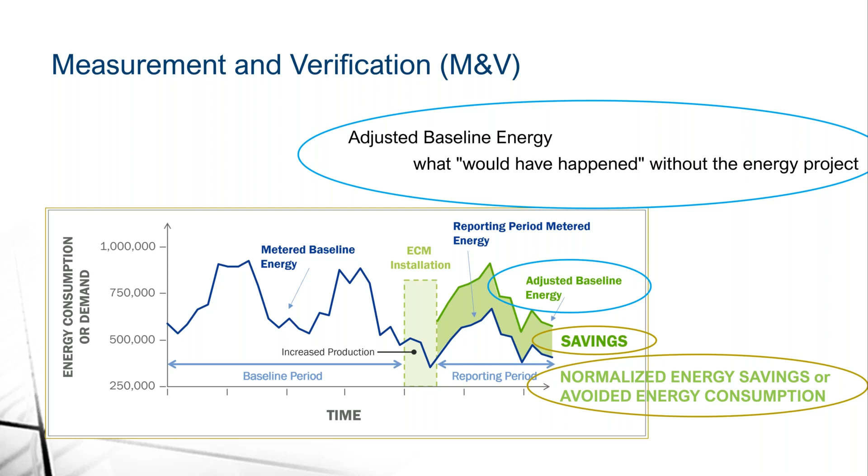And that would be normalized energy savings. What we call that is routine adjustments. These routine adjustments account for expected changes in energy consumption based on the independent variables. So independent variables that are included in the mathematical model, such as weather and occupancy, are used to adjust the baseline energy so that it can be directly compared to the reporting period energy or to a normalized reporting period energy. And so this gives us what we like to call an apples to apples comparison.

So what happens when things don't stay the same over time as expected? You can have a long baseline period that establishes very solid and continuous usage patterns, and then an event that causes unexpected changes in the energy use comes along, such as this shelter in place and COVID-19 situation that we are all dealing with. So if your energy usage changes within your measurement boundary, and your measurement boundary is either the whole facility for option C, the meter, or it could be for retrofit isolation, and these are due to changes unrelated to the energy project and unrelated to the independent variables, we call these static factors.

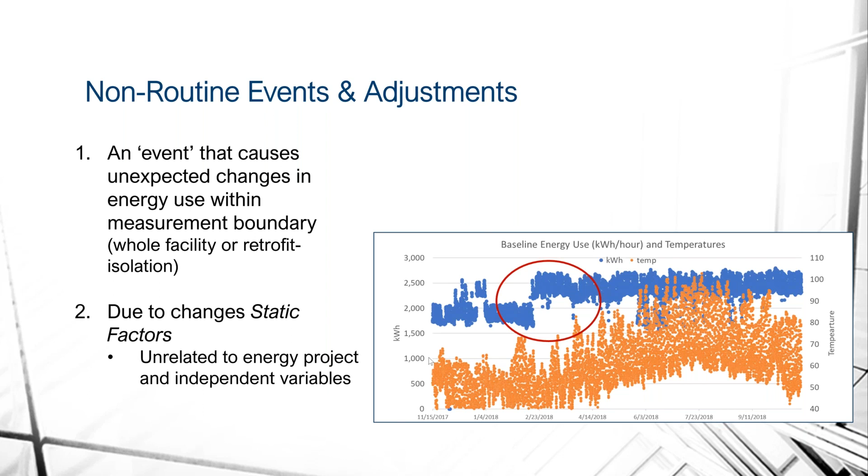Sorry, I'm having trouble changing my slide. There we go.

So when an event like this takes place, we may have to make a non-routine adjustment in addition to the regular adjustments, the routine adjustments, to account for these changes and how they have impacted our energy savings. So a non-routine adjustment is an individually engineered calculation that is determined for a specific project in a specific situation to account for the effects to your energy savings from these externalities that have changed.

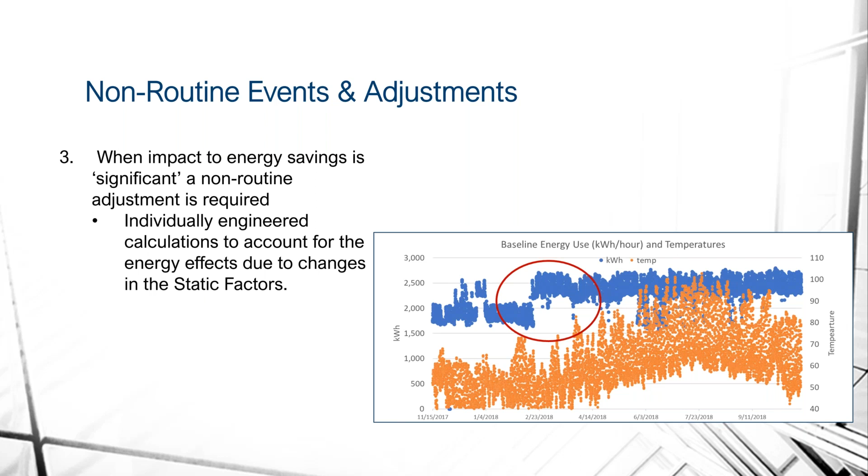I have the static factors, and there was a download available regarding static factors, and it is not a comprehensive list, but it's certainly a large list of static factors, which is a bit of a misnomer. We call them static factors rather than variables because they are not included in the energy model, but they are key characteristics of a facility which affect the energy consumption. So these are characteristics that are not expected to change. They're not included in the mathematical model, and typically we want to have those fully documented during the baseline period. So if you've done a comprehensive energy audit according to ASHRAE or others, you will typically have documented the vast majority of these key elements around your facility.

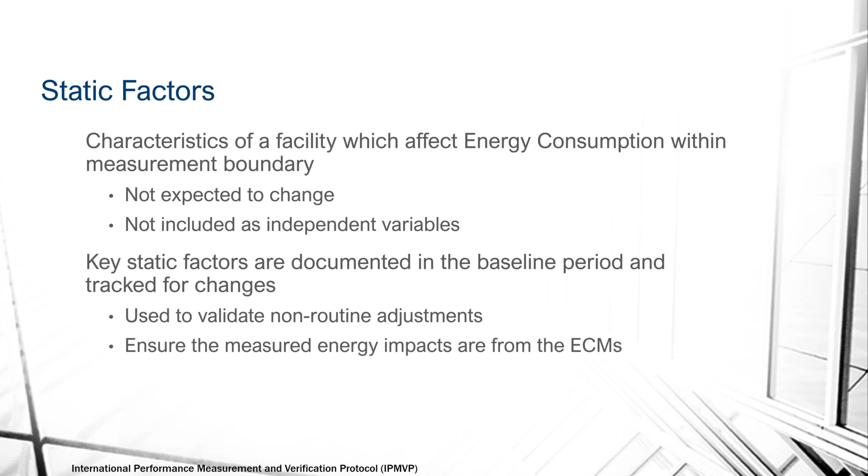It's important that they're documented in the baseline and tracked for changes for the duration of the project, because these static factors are used to validate any non-routine adjustments that are needed. And if you do not have that data, it is very difficult to have something to compare it to. Having these static factors documented also ensures that the impacts that we are measuring in the energy use are from the energy conservation measures and not from other changes at the facility.

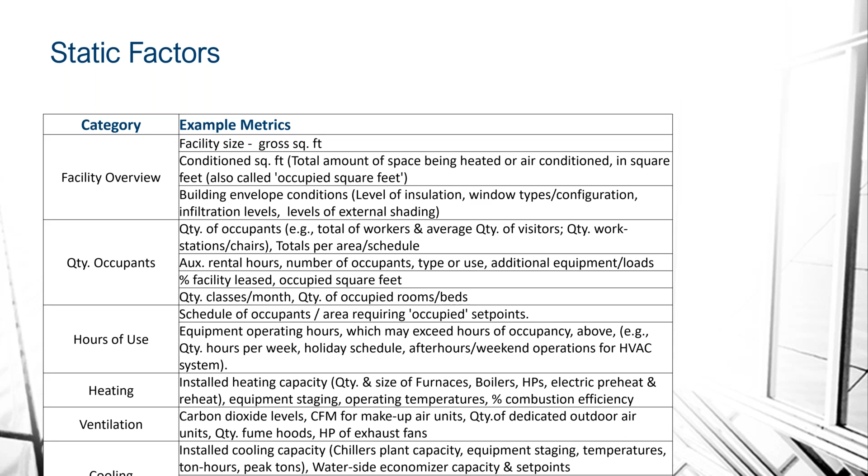So here is that document, or a piece of that document that lists several metrics. They're categorized by facility overview, hours of use, heating, ventilation, cooling, industrial loads, kitchen, cooking, hotels. It depends on what your drivers are, what will be the most important static factors for your facility. So that will vary. And this document is a part of the new non-routine events and non-routine adjustments application guide that IPMVP is working on with my team and Lawrence Berkeley National Lab. So that's a little bit of a sneak peek on what we're going to have included in that document.

So one of the things about non-routine events is that it can have a different impact depending on when it occurs during your project. So if you're in your baseline period and you encounter a non-routine event, you will have increased uncertainty in your energy model. The unexpected variation, if included in your baseline model, will create less certainty in the predictions.

It can also invalidate your baseline model if there is data that is included that does not represent what is going to be in the future. So you have to be careful about those non-routine events in the baseline period skewing your energy model.

Now, if you're in your reporting period and you encounter a non-routine event, it can either obscure or inflate the savings from your energy conservation measures. And that's actually one of your worst case scenarios, if you're in the reporting period. More difficult to address.

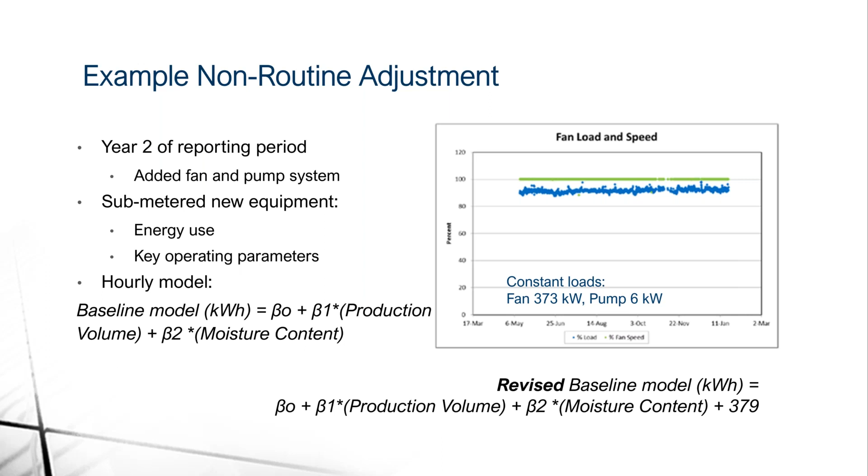So as I mentioned before, we are about to publish a non-routine event and non-routine adjustment application guide for the IPMVP. We're very excited about that. We also have in the works an advanced meter-based measurement and verification application guide to bring forward our option C, advanced modeling strategies. So that should be available soon.

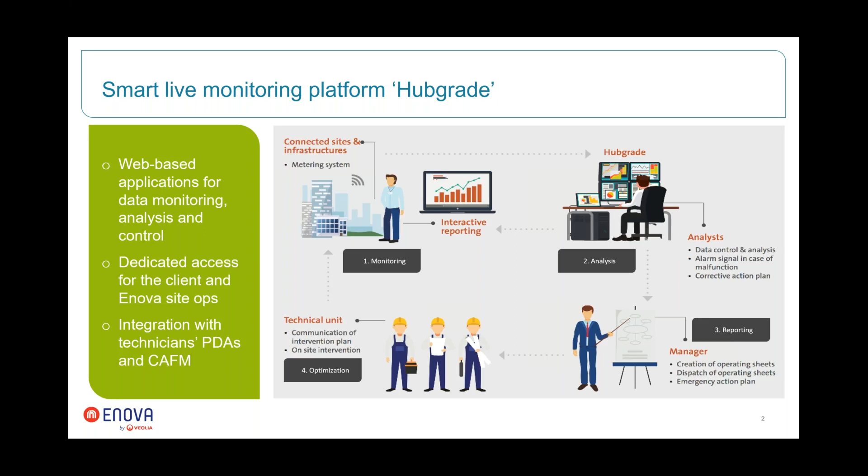So it's a closed cycle, since all the work orders that have to be issued for energy management come on the PDAs of the technicians, that they go and they deliver and they close directly on the PDA. The engineers can see it and see the effect as it goes. So it's a live system in order to reduce any loss as much as possible. This Hubgrade, we have more than 23,000 points that we are monitoring.

Enova now has bank guaranteed 68 million AED in savings. We issued in 2019 3,100 work orders regarding energy, and we are now introducing some new proof of concept works regarding machine learning regarding energy as well. And this will help us as well in the condition-based maintenance.

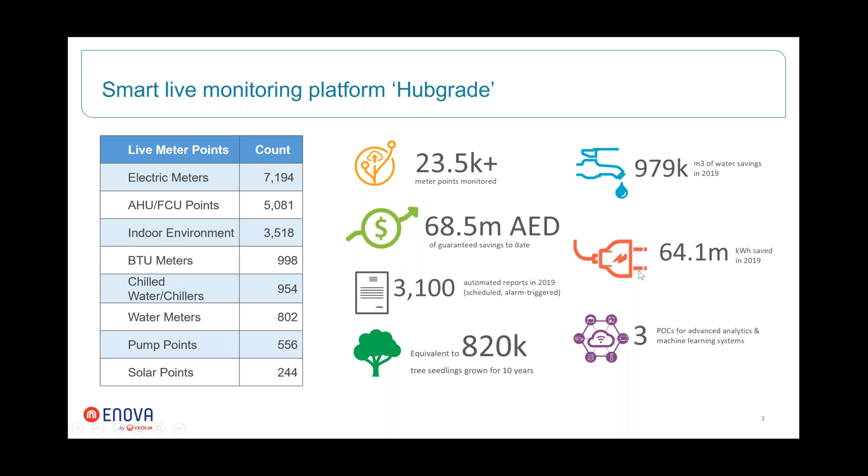So the regular journey of the M&V, as we saw with Leah, is we check the history. Most of the times, we install loggers. We perform the ASHRAE level 2 audit. We create the regressions, and we set the baseline. We identify the correlation, so what's affecting the energy saving.

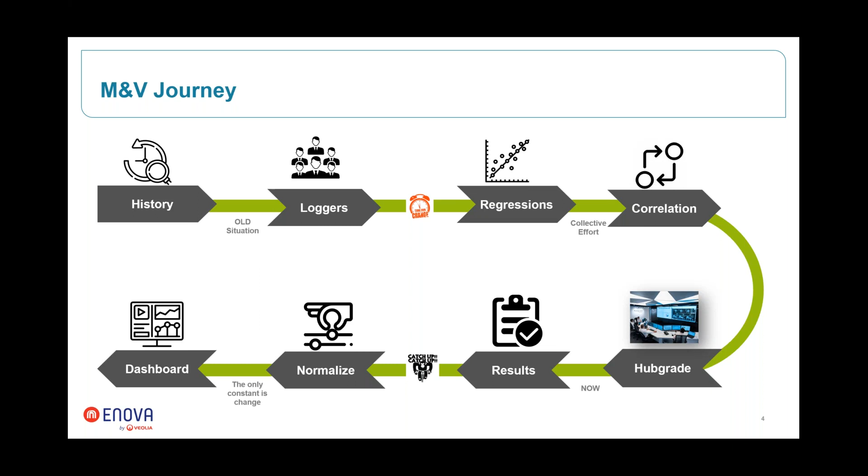We connect to Hubgrade. We monitor the results, then we normalize based on these correlations, and then we submit to the client based on a live dashboard. And this is usually a straightforward process, and it gives you a very clear picture of the baseline and the adjusted baseline.

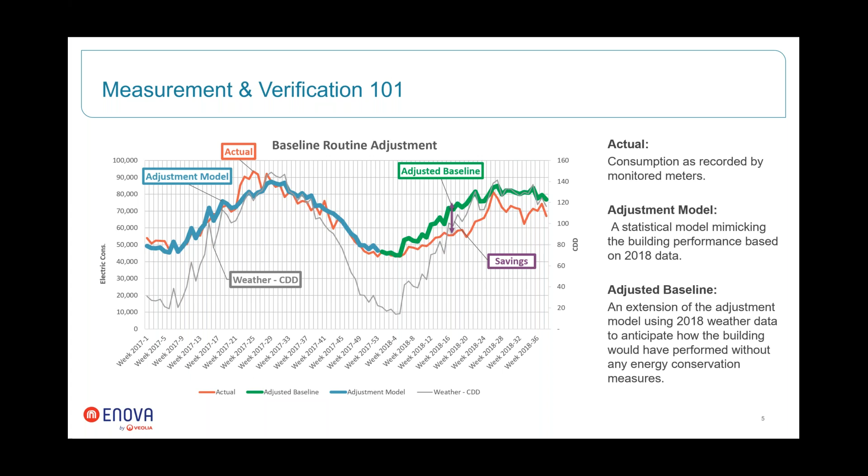So everything was clear until suddenly change happened, and it happened in an abnormal way. And this is when COVID hit, and we were asked to shut down the malls almost entirely. So before the shutdown, the main impactful factors on the adjustment were humidity and temperature. Footfall, or the number of people visiting, was part of the equation, but since it was stable, it did not affect the normalization drastically.

And just for information, Mall of the Emirates has more than 44 million visitors a year. The average daily visitors for Mall of the Emirates is around 120 to 150,000 visitors per day, which is a huge complex we're talking about. So after the shutdown, the humidity and temperature kept the effect, and then suddenly we had a huge disruption in footfall and on-off, which is shutting down the equipment in certain locations.

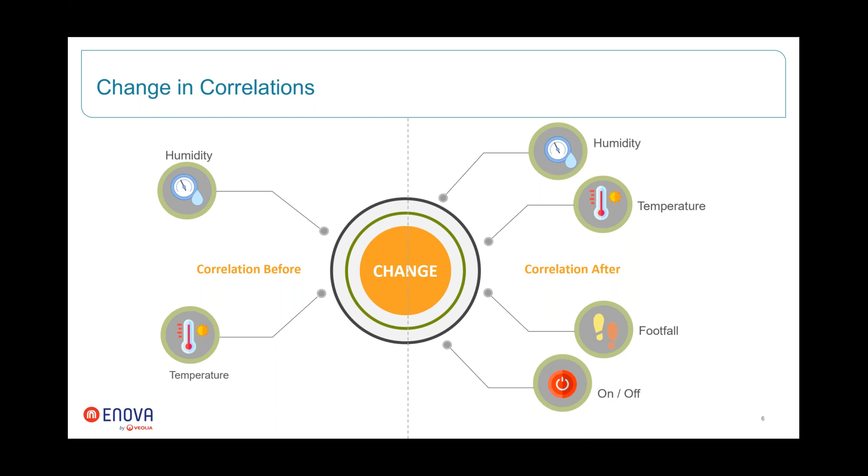So how did Enova approach this event? We used the change management process that is usually advised by McKinsey. So it's aspire, assess, architect, then we action, we advance, monitor, learn, and adjust. So I'm going to take you through these steps for Mall of the Emirates.

Again, some information about Mall of the Emirates. It's one of the biggest shopping malls in the world. It includes Ski Dubai, which is an indoor ski slope in the middle of the desert. We have around 630 plus brands, and as I said, it has 44 million visitors per year.

So Aspire: the minute this happened, we sat with the client and we set a high-level target of 65% cost reduction, since the mall is almost in shutdown except for a certain area. So we agreed this should be around 65% cost reduction in utilities. And then we assess the situation. You can see this

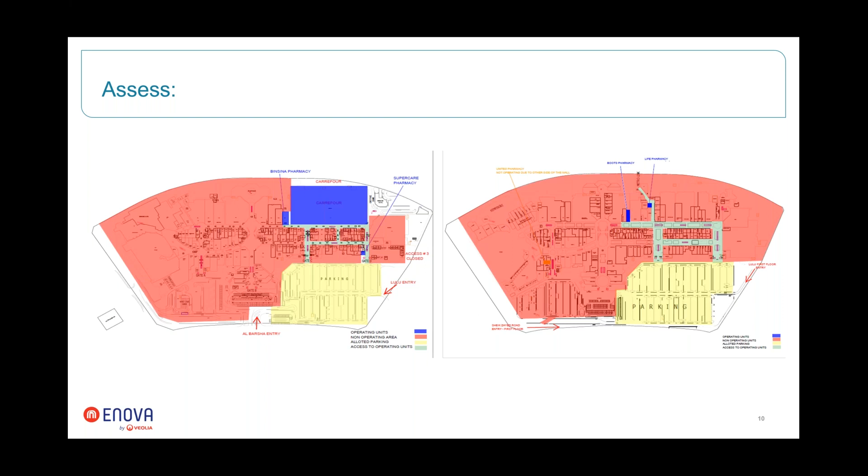Okay. So as I said, the assessment part: this is the mall in 2 floors. The blue area is the area that was allowed to operate, and everything else was shut down. The red is shut down, and the yellow is the parking that was allowed to open. After we did the assessment, we architected the shutdown based on each asset. So we went through the asset list, and we identified the on time and off time, and which period it will be operating.

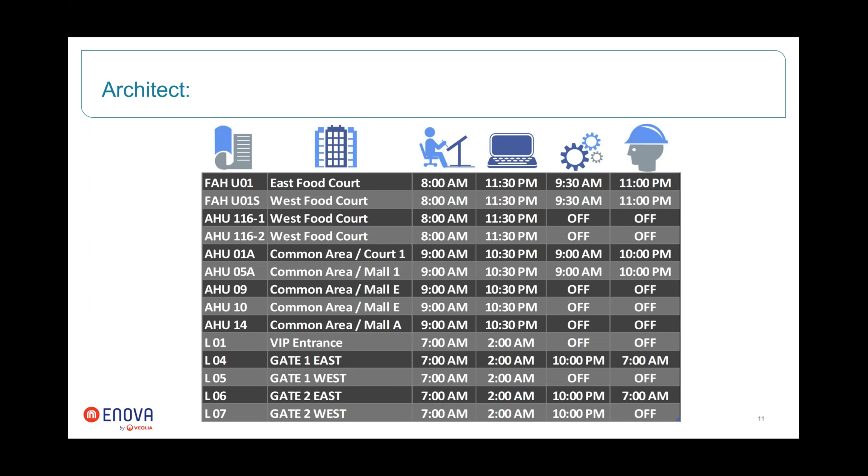After we architected this shutdown, we delivered. So we actioned the shutdown, and as you can see, it started on the 24th of March. The blue curve is the shutdown, and the orange one is 2019 numbers. So you can see a big difference in utilities based on shutdown. So this is electricity, and then we have water as well.

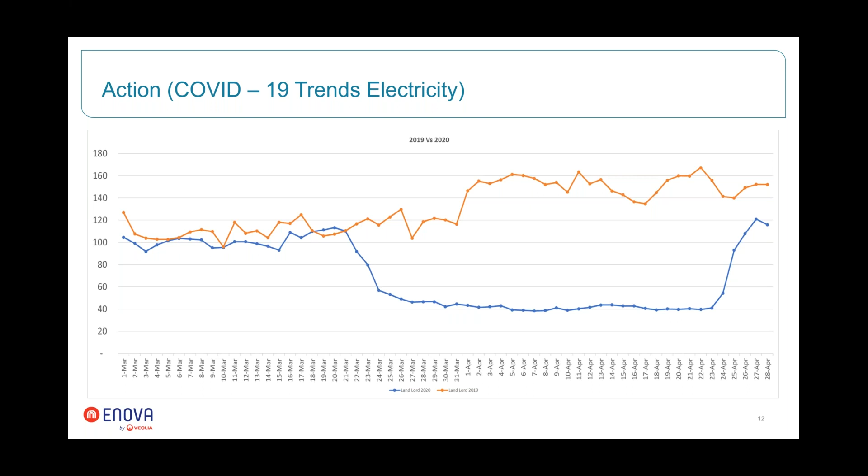It is worth mentioning that our baseline for Mall of the Emirates is 2018 figures, as you saw in the previous data. And we had a loading factor of 0.7, so 70% of the time the overall system was in operation. In 2019, due to some energy performance measures that we did, the overall loading factor went down to 0.65 or 65%. These are important figures for the non-routine adjustments.

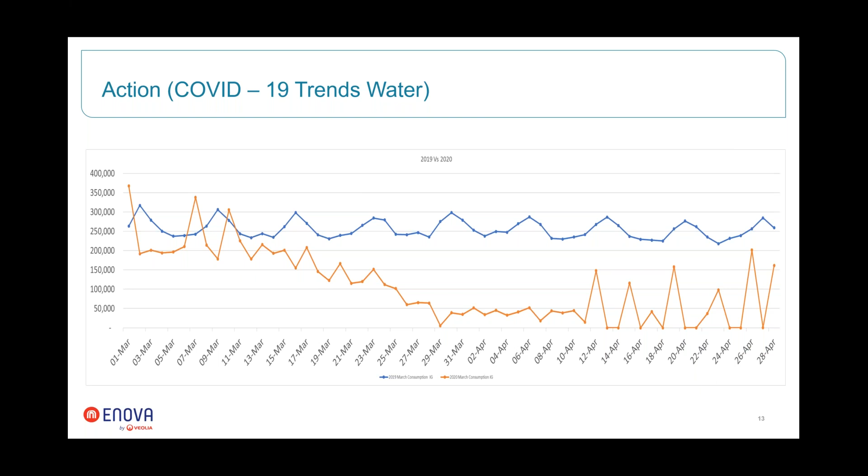So after this, we did the routine adjustments that are based on footfall. It was based on weather, and the saving was still 50%, which is abnormal, of course. So we went down to the sub-meters, as Leah described, and we identified again the regular adjustment that is based on footfall. So these are the areas that were actually operational.

So we adjusted based on footfall and weather, and we identified the overall loading factor during shutdown was 0.25 or 25%, and we adjusted based on loading factor. So between 2019 at 0.65 and 2020 at 0.25, there's around 0.4. So we adjusted based on this difference in loading factor on each MDB or sub-meter, and then we did it over the overall project.

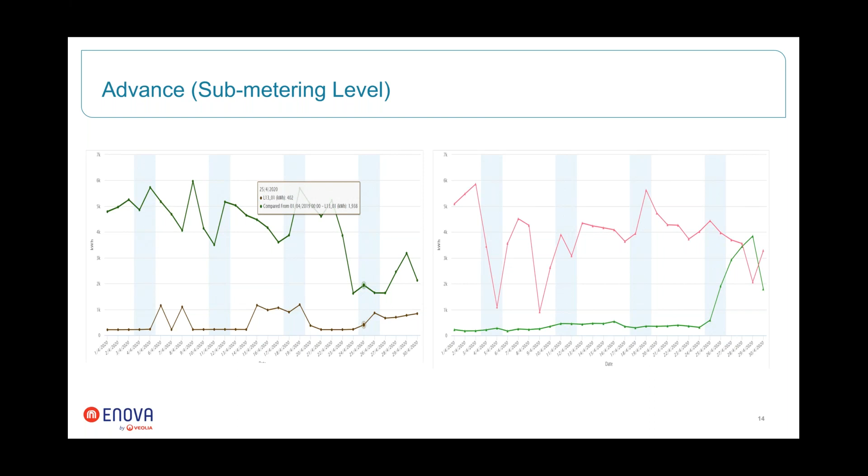This gave us some learning. So first, during the complete shutdown, we had only 15% of the capacity in footfall. So the footfall was 15%. The consumption went down between 70 and 75% year on year, compared to 2019. The best approach was to go into the MDBs, prove our M&V process, which is routine plus non-routine based on load factor, and deliver the figures in order to make sense, and then take it on the whole mall.

So when we identified that this is relevant, the model was used on the overall estate, and we established with the non-routine adjustment that actually our saving based on our initiatives was 8%. So the reduction was 70 to 75%. Around 25 to 30% was due to footfall and weather, the rest was due to shutdown, and 8% was due to Enova efforts. So these are the savings, as we said. It's based on the routine and non-routine adjustments.

So in conclusion, since this was an unprecedented thing that happened, we really counted on IoT and sub-metering to deliver this M&V approach. We identified the non-routine adjustment that needed to be taken. We executed, and now we're building the new norm after COVID, because as of yesterday, the malls opened at 100%. It was gradual: 30% occupancy allowed, 70% occupancy allowed, and now it's 100%. So now we are back to somewhere close to the new normal, and using our agile approach, we continue to measure, learn, and build again in order to achieve the new norm.

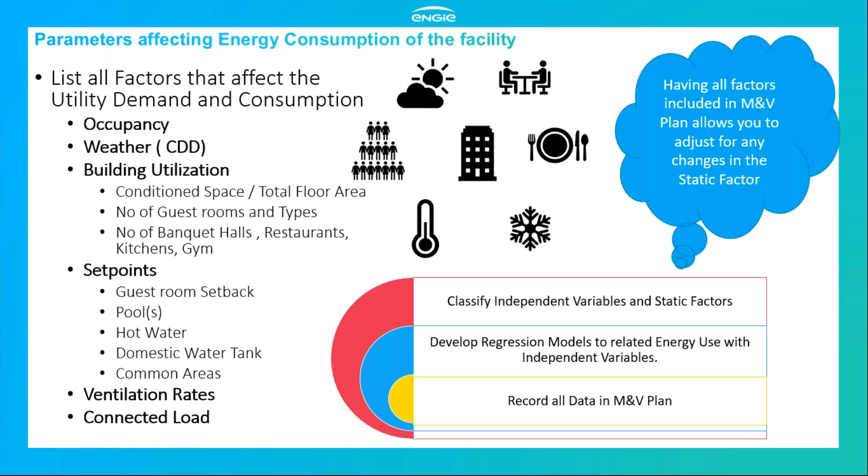And obviously some common area set points, how the common lobby and other areas are maintained, ventilation rates, and the total connected load. Now this is very important because at the start of the M&V activity, what are the parameters we need to measure, and record all of them in the baseline model. So that's the first part of the M&V activity. Then obviously at the time of implementation, you make sure that the ECMs are working, but during the reporting period, it's very much essential that we keep a record of all these changes as and when they happen.

Now, some of the baseline strategies that we have used and would like to highlight: for the projects that are Option A based, we do not need any non-routine adjustment. Let's say, for example, a lighting retrofit, the operating hours were estimated, hence you can verify that very accurately during the post-operation period.

For Options B and C, which are long-term contracts, which are mostly the case in this area, if your retrofit period is more than 6 months, the way we did it is we used a regression model, which is called an energy performance model. Basically looking at the post-retrofit energy consumption and then relating it to the independent variables that were identified during the baseline to create another model, an energy performance model, which describes the energy use.

Then we compared it with the adjusted baseline, and then we said that this difference is basically providing us projected cost avoidance had the business been in the usual scenario. So I will just explain that in an example in the later slides.

Use submeter data. It's stressed upon by Leah and Amin as well. Use submeter data to calculate the variation from the annual equivalent period. It's very much essential that submeters are used, especially for Option C; that enables you to look at the operation of the facility which is not directly under your scope of ECM implementation.

If your post retrofit is less than 6 months, obviously you can use that submeter data and develop a quarter hourly advanced analytical model, which would require further time, and obviously you have to consider the cost of the NRA versus the cost of doing the NRA.

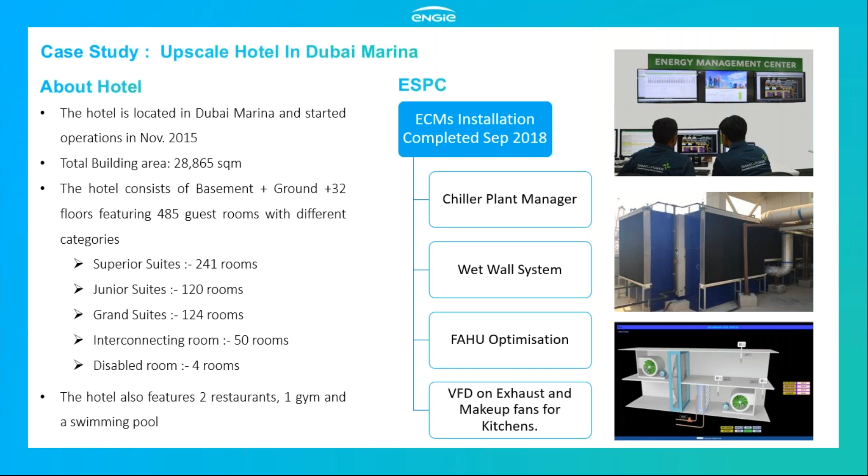The current situation. The facility has been closed since 25th of March. Our contract started in October 2018, so it's almost 19 months in operation, with 2 months in lockdown where the entire hotel has been closed. Only the HVAC system is operating to maintain the healthy state of the interior. Set point increased from 24 to 27. Guest room FCUs are operational to maintain the furniture. Fresh air operation reduced to 8 hours. So as we understand, the ECMs that we implemented are still in operation as they relate to the HVAC system.

If we look at the performance of the building in this case, the green area denotes the energy savings that was incurred for the period. And as we move towards the region, which is basically April and May, we see that there's a huge drop in the energy consumption and we see a huge savings increase. Now here we have seen a 74% reduction in bill-to-bill energy consumption, while when we calculate the net savings, we got 74%. So does that mean we can say that yes, these savings are by our ECMs? Obviously no. We need a way to differentiate between the various components of these, which are then provided in the next one.

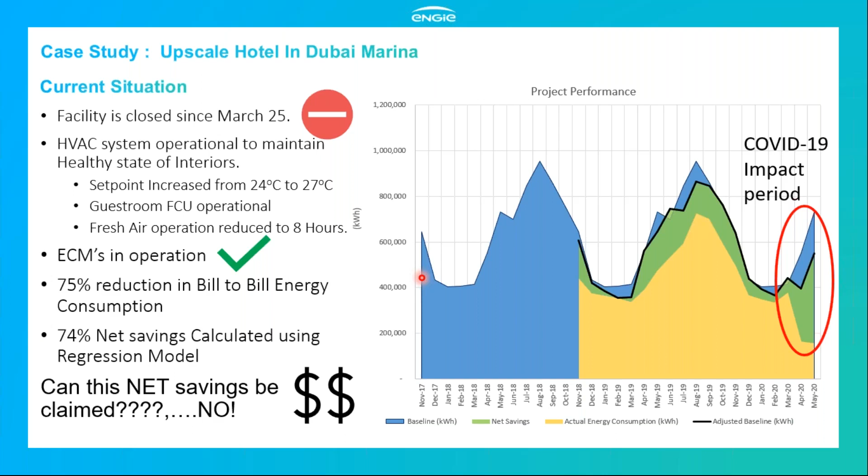So the reasons and the baseline adjustment. We had a reduction of operation, all services related to the occupancy, the pool, the spa, the restaurants, everything closed down. We had reduction in occupancy. We had reduction in building heat load as the set point was increased from 24 to 27. Obviously, the weather makes a routine adjustment, and the impact of the ECMs, which are then running. This all resulted in a gross reduction of 75%.

So how did we basically go on to do that? We applied some engineering principles and our experience. We used sub-meter data for occupancy and operation. We used CDD coefficients for weather, which was defined in the baseline model itself. For the impact of ECM, we basically did a post-retrofit energy use model, or the energy performance model, for after the implementation was carried out and found out the difference between the two.

And then obviously a change in set point, where we substituted the CDD with a higher base temperature. So we used a base temperature of 21 in our model. We implemented a 24-degree base temperature in the same model for post retrofit, and then we calculated the difference due to the change in set points.

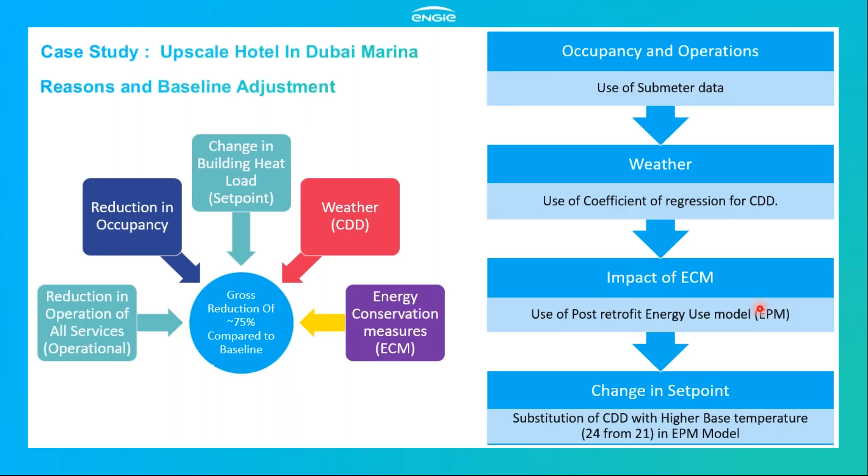Now this is basically giving you some very specific numbers for this project. You can see that the baseline for these 2 months was about 1.2, broken down into 2 sections, bill-to-bill savings and the actual consumption. So you can see 964 and 316. This was the actual consumption of the facility, which is almost about 75% less. Now from this 964, the challenge was to break it down into these sections, which are basically due to ECM, due to drop in occupancy, weather, and reduced operations. We used different formulas, as I explained earlier, to find out these gaps, which then helped us to calculate the adjusted baseline plus the non-routine adjustment.

So the conventional formula says that you can calculate the savings by adjusting the baseline and then adding routine adjustments, non-routine adjustments, and then subtracting it from the actual savings. By doing this, we were able to define what's the adjusted baseline and then calculate the savings. Obviously, we went on to claim the savings only due to the ECMs and not due to the set points. And we see that of all the savings of about 964, we are claiming about 170,975.

This means that even in this period of lockdown, because of the ECMs being implemented and monitored through remote access, we are able to save a considerable amount of energy for the client, which helps them to reduce their operational cost in these desperate times, when all people are trying to do that.

So the message here is very simple, and as highlighted by Amin and Leah, it's very important to highlight and record all static factors in your M&V plan. Look at submeter data at all times, keep track of the energy consumption, visit your site sometimes to see how the facility's static factors are changing. Is there any addition or deletion of spaces? And the last important thing is, when you guarantee the savings, make sure that you look at these factors and use percentage savings more than the absolute numbers.